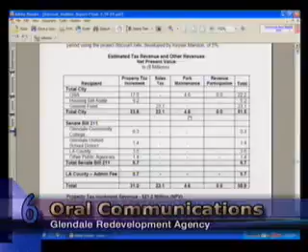If we had that property and were to maintain it, it would cost us $4.6 million, but we have pretty much given the full rights and authority for this park to Caruso. So as such, we only have these two particular sources of true income that the city can expect. But I would suggest that perhaps we can take a renewed look at those sources of income to see if they really match with what the original objectives were.

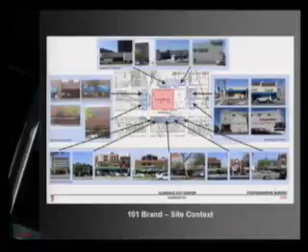Thank you. I'm Chris Hilton, HKS Architects. I'm one of several design directors with the firm. 101 Brand, as Scott said, is a significant investment for Legacy Partners. They look at 101 Brand as an opportunity, but an opportunity with some serious issues that are preventing the building from performing to its capacity, either in office or retail.

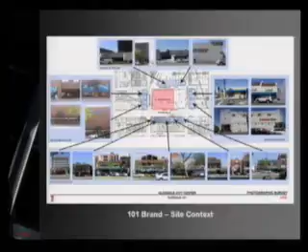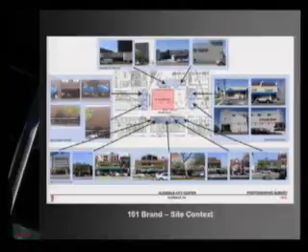This is a quick overview of the site. We all know where 101 Brand is, between Broadway and Wilson. It occupies approximately two-thirds of this site, on the east side of Brand. There is a new project coming on the north side of the block; I'm sure you're familiar with that.

The existing conditions for 101 Brand are not conducive to a Class A corporate office identity. They're not conducive to a functioning, successful retail identity either. If we were to sum up what we see from the street, the imagery of the ground level plaza, the building entries, and the retail, is clutter. There is tremendous visual clutter, and it's a combination of a lot of things: softscape, trees, poorly designed signage that is more of a problem. It actually doesn't function well as signage, and it just contributes to the clutter. We can't see the front door.

Even someone who's not involved in real estate would recognize that this building has a serious deficiency. If I can't find the front door, how are we going to rent this building out to Class A corporate tenants? Here's some other views of the existing conditions. The artwork also presents an issue because it's in direct line of sight to the front entrance of the building. The building has an architectural problem. Were we to remove all of the clutter, we would still have only a pair of doors hidden within a glass wall.

There's no identification of the door, even were we to remove most of the clutter that's prevented us from seeing the front door. Here's our plan. What it involves is, if the center of gravity is in the center of the plaza today, with a series of nine planters and palms in this area, the artwork in the pool, we are moving that to the north.

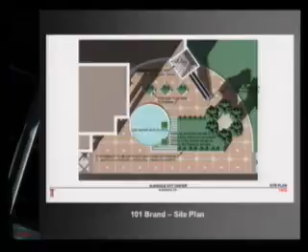The idea here was to introduce more people-friendly green space into the design. Right now, there's roughly 25% green space and water to hardscape in the existing design. This design raises that level to approaching 60% green space and water to hardscape. That would not, of course, include this area, which is city sidewalk.

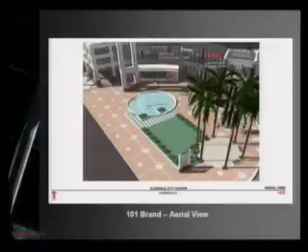If we look at this in aerial perspective, we can see the major elements. Again, we're removing and relocating artwork, removing palms and relocating those to this location to try to animate our approach to the second-level retail. We're introducing a much more friendly green space here for pedestrians. We've redone the signage consistent with the architecture of the building.

We're introducing a major new entry element to define the front door of the building. We're also introducing some blade signage here to help some of the colonnade retail that is not performing as well as it should. So this design, as you see it here, both in aerial and perspective, removes most of the visual impediments to seeing both the signage on the second level for the retail and the front entry of the building. We now have visual access to those elements.

This is a quick view of the landscape elements. Again, we're just relocating existing palms, introducing some dwarf palms into the planters, along with annuals, and then succulents along the edges of the green turf.

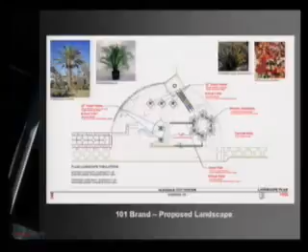Artwork: if you look, as we're moving along the sidewalk or along the street, you can see that the existing artwork is in direct line of sight to the entry. If we're going to invest in what we think is necessary here, we want to relocate this art both to solve an issue in terms of seeing past it to our entry, and to get it into an area where it's more involved with the traffic going to the residential or retail area, the Palm Court, and the second level above the escalator landing.

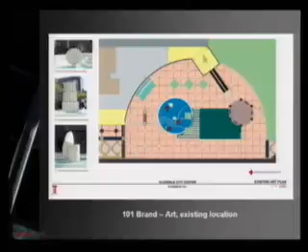When we arrive up at the landing of the escalator, we're putting the two smaller pieces of art in this location where we can get more interaction between people and the artwork at this level. We're really animating this entire experience of arrival at the site: recognizing the retail through the signage, passing through the circular palm court, experiencing the art, riding the escalator, and experiencing the art again.

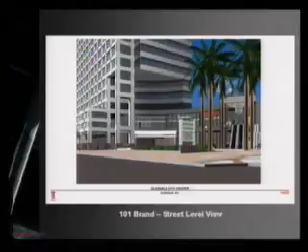This is where we will win or lose the day. This is the street level view from the sidewalk, from the street. Here you can see we now have an unobstructed view to the building entry and the new building entry element that we're adding to the site.

The new signage element that we're adding is the initial experience leading you to the circular palm court, the escalator, and the pyramid landing at the top of the escalator with two pieces of art up there, an additional introduced lantern element, and a lighting element working with the signage at the base, then moving on into the second level. You can see we've got some things occurring in there.

When you arrive at the second level today, it's a little disappointing. Clearly there's not much color, it's dark, it's not very friendly. We've got a very successful restaurant, California Pizza Kitchen, but we've had trouble leasing the other spaces.

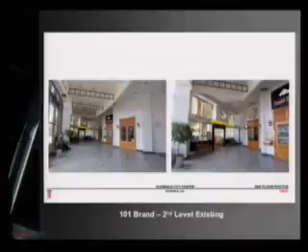So the proposal here is to go in and continue the experience through a very exhaustive remodel of the second level. You can see some of the ceiling elements we're looking at include lighting, and those would be visible from the street, from the sidewalk, once we remove all the clutter in the way of those.

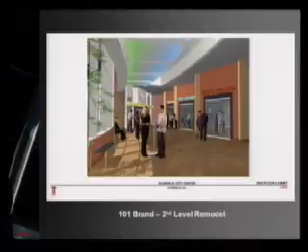The nighttime experience, we see clearly the project is 350,000 feet of office building, 60,000 feet of retail. In the daytime, it should have a successful office building environment, and we think we've achieved that. But in the late afternoon and evening, through lighting, signage, and more animated paths getting to the retail, we think we can turn it into a much more animated retail environment, a more active space in the evening. Right now it's pretty dead, and that's what we're trying to achieve with this implied lighting.

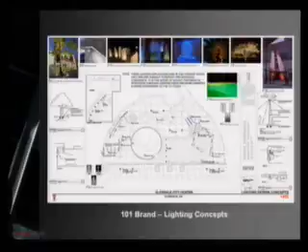Here's some of the ideas we're looking at in lighting, some of which we've committed to: animating the fountain with more jets and more lighting in the jets, lighting at the edges of the fountain. We're trying to take that fountain and turn it into a much more animated, living event in the plaza. Lighting for the palms at base and staff, and lighting of the shaft—that we're committed to as well.

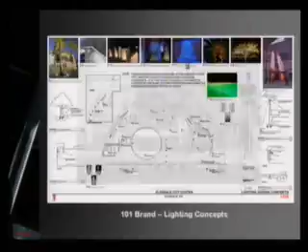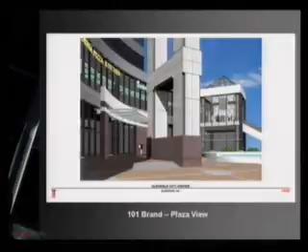But we're looking at other elements as well to try to improve the nighttime experience. Going through individual elements of the plaza, this is the now visible new entry element—a granite, aluminum, and glass entry canopy leading to the front doors, which are merely buried in the glass wall. This is done in a style consistent with the original architecture, consistent with the quality and materials of the original design. Here you see the lantern element and some of the artwork at the second level escalator landing.

You can see some of the more animated areas on the second level of the retail. One of the things we're doing here is replacing all the glass on the second level, which is currently a dark gray tinted glass, with clear glass, so that we can see in there, so that when we're spending money in that space, we can see it and draw people to it.

Here's a detail of that particular wall. Again, the materials are granite and aluminum. We've got a signage element, which is part of the signage package here—this is a building identity signage. This merely repeats what exists elsewhere on the building. Again, the materials are granite, aluminum, and glass.

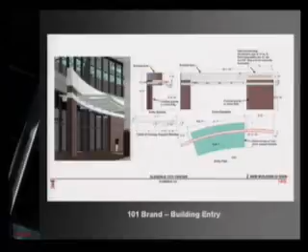Another element here is the retail signage on the street, which starts the retail experience. That's built out of the same base materials as the building, consistent with the quality and design in terms of materials, simplicity, and the corporate nature. In the evening, this is an internally illuminated sign with illuminated graphics as well, so it's got both a daytime identity and an evening identity.

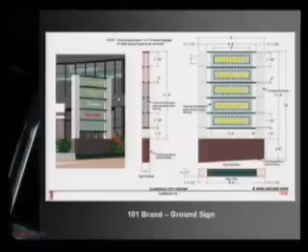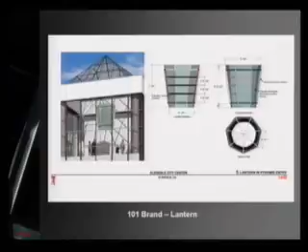The lantern, designed in the same quality and same materials, sits at the landing of the escalator, shared by the two art pieces. Here's another issue that is underperforming: the retail under the colonnade along the street. As you can see, it's dark under there. No one sees it, no one knows it's there.

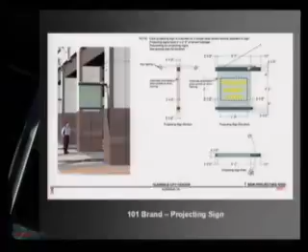We're proposing to introduce blade signage mounted on the columns that would identify the six different possible tenants in that location. This is designed consistently with the design concepts of the major signage we introduced in the plaza. This is internally illuminated blade signage, and if we don't have a tenant, we'll probably introduce a graphic that describes the project.

Materials: these signage elements and architectural elements are all custom fabricated, but made from readily identifiable materials—granite of the building, various aluminums and finishes, glass, and plexiglass.

This is part of the signage survey. By ordinance, when we introduced anything new in the signage, we needed to go back and do an entire survey of all the signage on the building, both ground floor, second floor, and exterior signage.

Phil, thank you. I appreciate that.

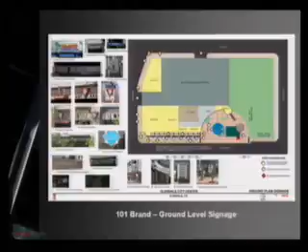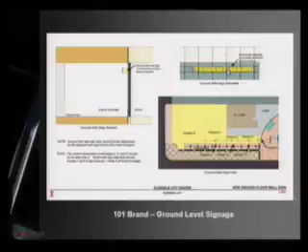For the exterior, we originally approached this as an interior signage element, but we ran into a rock and two hard places on this one. The retailers were not receptive at all to doing that on the interior, so we're sticking with what they currently have, which is signage mounted to the exterior of the mullions.

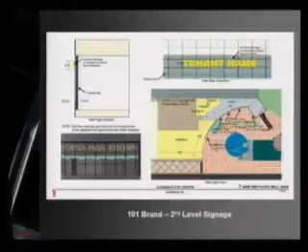More definition of the possible tenant spaces and possible signage locations. This is all part of the signage variance package. And with that ends our presentation, unless you have any questions I can help you with. Okay, thank you very much.

I don't have any cards on this item, so I'm going to close the public hearing and give it to my colleagues. Mr. Yusefian. Gentlemen,

A couple of questions. On your first page, on site plan, it talks about adding water jets to the pool. Could you elaborate on that? It's our intention, since we're asking to remove and relocate the artwork, to reanimate the pool with water jets located around the perimeter. We're working on a design as we speak, and then to animate the jets with light, as I showed you in the lighting diagram.

Okay, do you know what shape it's going to take? Is it going to shoot straight up, or is it going to go inside? Arcing inward is the general intention at the moment, and it's circular, fixed around the perimeter, but there would be individual elements at various levels within the pool. The pool is multi-leveled and has several falls, so we're in the design process right now, as I indicated in the lighting diagram. We're committed to that particular animation of the pool and the lighting that would further animate the water jet.

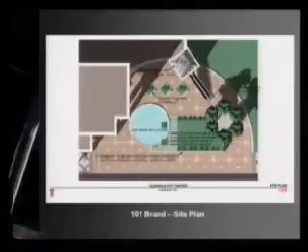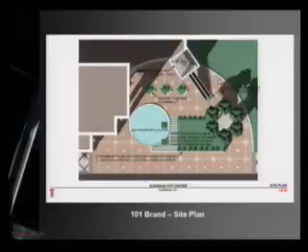Right, we know from their design goals that there's a restaurant in that location. But it's on the edge closer to the street, not an edge further by the escalator. That's correct. Actually, that area is less of an interface — it goes up two or three floors before they have landscaping for their pool and so on. So I hate to see mature trees, especially palm trees, which cost a lot of money at this size, just thrown away.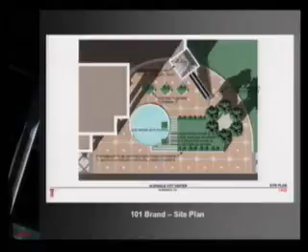You are changing lighting and introducing a new light fixture into the escalator area, but then you showed what the arcade looks like, and if you look at the lighting in the arcade, it's completely different and inconsistent with what you're putting into that tower. If we go to the lighting in the arcade, there really isn't much — that's part of the problem. It's very dark.

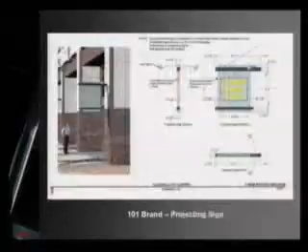Let's see if I get back here, in this area — look at those light designs. They basically have an amber color shade, which softens the light a lot. It's a different design than what you're doing out there. I'd say it's not as contemporary as what you're putting in the other one. What if you just change some of those lights so they're complementary to what you're putting in there? That's definitely something we can consider.

Okay, and that would solve two problems. It will be more consistent with what you're doing, modernizing it, and it will also brighten up and bring some more light in there, making it more inviting for people to go in.

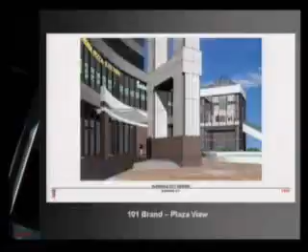The other issue for me is that you have created a nice flat grassy knoll area in the center, while you have a little sitting area on the...

See, there's a little sitting area, and that is a function of the elevation of the dirt. You have to kind of put that in there to retain the soil. On the opposite side, there's an opportunity to have something similar, even though you don't have a grade elevation issue, to create that type of wall on the opposite side.

So this way people can sit there while they're waiting to be called, while their vibrator goes off saying it's your turn to come eat at the restaurant. That would be helpful, even though there's no grade reason for it, just for friendly purposes. I don't think people want to sit there watching traffic go by—they'd rather sit on the other side and watch their friends get a seat before they do, or wait for their vibrator.

The other big objection I have to this project is removal of all the art from the fountain. Now, you don't have a lot of attachment to it—you don't live in Glendale. This, and a couple of horses on Brand, are the only two major art features we have on a building in the whole city.

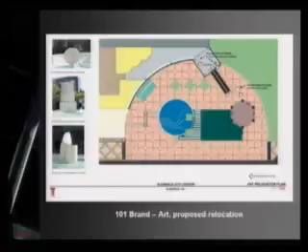One man's giant lifesaver face and a birthday cake is another man's giant ball of string at a contemporary museum of art. So I like what you're doing with it.

In my mind, if it's not going to be there, then all of it has to go. It's not our job to re-edit someone else's art, that's not our expertise and background. It's just a philosophical difference that some of us may have.

I do like the fact that you're introducing two smaller elements at the top of the escalator, because it is just an empty, nothing space. You will justify the space and justify the art by placing it there, and you'll lend focus to it. In addition, the thing I keep referring to as the birthday cake, it's a larger piece, so you will also lend focus to the downstairs.

I'm just curious whether or not we ever got his take on this piece and what we're proposing to do with it. I'm very pleased with the changes, I truly am.

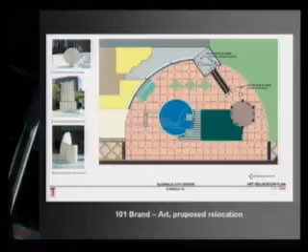However, if that had not existed, if it were placed in the manner you're planning to place it, 5 years from now, 10 years from now, if another architect came by and said this belongs down in the pond, down there in the front, we'd all be saying the same thing: hey, you're messing around with something this city is used to seeing.

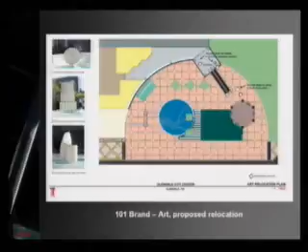I do like what you're doing, and I'm ready to go ahead. And I guess that's the end of my comments.

Mr. Quintero: I'm also very happy with the design. I think it really clears up the plaza, and I do like the artwork, the way you've grouped it, one at the bottom of the escalator and then the two at the top. The blade signs, I think, are absolutely necessary for the businesses under the colonnade, so I think that's a very good idea, and I think you've done a great job.

I'm looking forward to seeing the changes. After all these years, I still don't think of it as an office building, because you have some excellent tenants that have been there for years, Olive Garden and Islands, California Pizza Kitchen, so I think this refurbishing is going to help you attract the corporate tenants you're looking for, and also provide a great commercial space.

Thank you, very satisfied with your approach. Mr. Weaver: well, everything boils down to economics, how much money you have to invest. If I had unlimited money, I'd design it totally different.

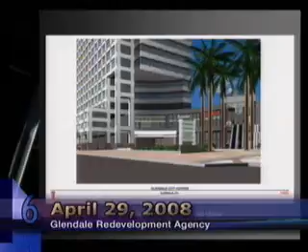Well, I think you make a good point, and I think you can recognize that the genesis of this particular element is consistent with the architecture of the tower. If it's being bent one way, it's not toward the looseness of retail, but the rigidity of corporate America—that's what's leading that design.

Now, we heard your comments, and we did some studies you might want to look at. They generally stay with this proposal, but they add a little more zip, a curve, a few things. One is very subtle on the left, the one on the right is a little more versioned. I don't think that's an issue anybody's going to die over, but it still has more of a corporate feel to it.

Okay, let me go to Mr. Quintero while you look at that. Yeah, I wanted to suggest, if you have trees, you could box them and donate them to the city of Glendale or some other nonprofit. I think they're taking notes—yeah, give them to us. Can you box any of my colleagues and donate to another city? Where there's a will, there's a way.

All right, that got an applause. All right.

Mr. Starber. Well, maybe just on the sign, a question on how it's constructed, materials—the rendering leads you to believe that it's not a typical box sign where a plastic face is in a metal box. It looks like the entire box, essentially, is illuminated from within, which is a very different look than a standard box sign like we saw represented at the marketplace. Here, the entire box seems to be translucent and illuminated from within. Part of our desire is to have a daytime corporate image, then have it transition with the lights in the afternoon and evening into something more retail and festive. Actually, between the two signs, I would prefer this design over the other one—I think it's actually cleaner, crisper.

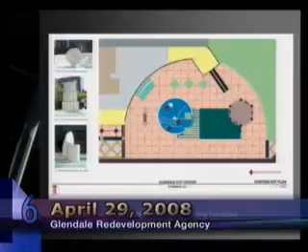So with that, Mr. Weaver, did you have a motion? I'd like to move 6B, items 1 and 2. Second. If there's no further discussion, roll call please.

Agency members: Drayman? Yes. Quintero? Yes. Weaver? Aye. Yousefian? No. Chairman Najarian? Yes. Let's move on to 6C please.

How about... we did 6B, 1 and 2, correct? Yes, 6C.

At 6C is another public hearing, from the Director of Development Services, regarding Stage 1 design review for the Glendale Triangle mixed-use project located at 3900 San Fernando Road. At C1 is a motion approving Stage 1 design review, subject to comments and conditions from the city's principal urban designer and the agency. Thank you.

This is a formal public hearing, and I will open up the hearing at 6C. Mr. Lanzafame.

Mr. Chairman, members of the agency, this is a Stage 1 design review of a property in the San Fernando Road corridor. Just a reminder, we have taken quite a few projects, Stage 1 and 2 together. Stage 1 is really site planning, massing, and scale. You will see introduced a little bit of the architectural design, but really what we're looking for is massing, scale, site planning, and then from that, your comments, they will start to finalize their design and use that as their project description for any environmental review.

So don't drill down too deep, fellas. There will be some refinement in the architecture, if I could translate your comment that way. We'll continue to work, the developer will continue to work with the urban designer, Alan Loomis, to bring you a final sometime later this year.

So here's our site here, the triangle site in the middle of all these great amenities, next to the train station. I don't have a pointer, do I? Does anybody have a... Use the mouse as a pointer. It's around the arrow. Whoops. How do I go back?

Okay, so we are between San Fernando, Los Feliz, and Central. A quarter mile or a 5-minute walk to the train station here, at a really interesting intersection, or crossroads, for an architect to work on a mixed-use project.

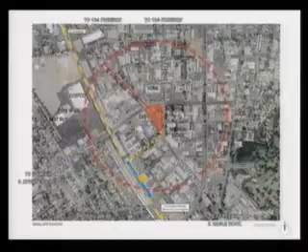A little more detail here on this aerial photo shows some of the zoning information in the San Fernando mixed-use area, in the industrial mixed-use area with, as Dan mentioned, the Vons and the CBS and, of course, the hospital. What that means for us in starting to look at what this project wants to do, both architecturally and as a new element in the community, is how does this serve as both a mixed-use building but also as a gateway into Glendale and a gateway into this new area, looking forward to all this revitalization.

What we've come up with is a two-tiered approach. One is the 3 dotted circles you see there. We are planning these as landmark corners, these iconic elements that will serve as wayfinding devices, letting you know that you're coming in from Atwater Village, you're coming south entering Glendale, and you're seeing these corners and you're saying, wow, here I am coming into Glendale.

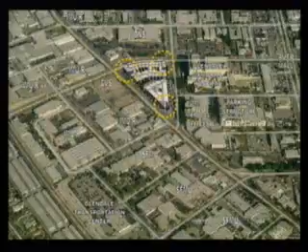That being said, here's our architectural story, if you will. At the junction, or intersection, of San Fernando and Central, we're planning a dynamic corner element that we've affectionately called the apex. Every architect's dream, I think, is to have a triangle building that comes to a sharp point, and we've taken that as far as we can go and still work within the setbacks. We've extended that, and I've got some great views of that in the next couple slides, so I won't talk too much about it, but we want this to be a dynamic wayfinding and iconic corner.

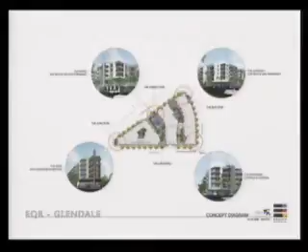Similarly, over on San Fernando at Los Feliz, we have what we call the gateway, a hovering or floating box sitting on top of a glowing retail storefront, street front, that will tell you you're coming into Glendale from the west. The entry is also what we're calling the entry into the building, for a pedestrian, both a guest or a resident. And then we've got another important corner intersection that I sometimes call the anchor. It takes a positive corner and comes right down to the sidewalk. It does not have the negative space of a plaza in front of it, but sits right at the sidewalk in a confident urban gesture.

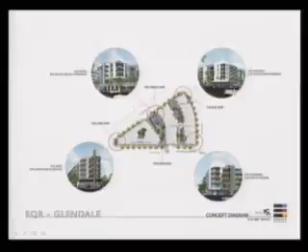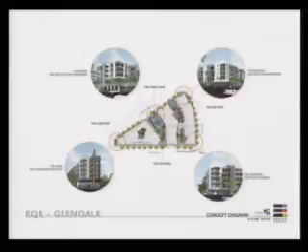And then down on the sidewalk level, we have a street cafe where the sidewalk has been widened, an area called the crossing, directly across from the hospital, where the sidewalk has been widened. This is the second, or backdoor, entry into the project. And also the bus stop up at the corner of Los Feliz and San Fernando, where the sidewalk has been widened to accommodate waiting for the bus.

Here's that apex corner in the first part of our schematic design. Proposing here that there could be a significant arch element that comes out, literally reaches across the plaza at grade. We're proposing that it has a thin light element running up the middle so that at nighttime it continues to act as a wayfinding device, and possibly running these decks, the private residential decks, out on top of the plaza area, really emphasizing that this is an important corner.

This possibly could be an art component to the project. We really like the idea that the art component can also be a part of the architecture, come and touch ground, and be a part of the urban design. I think that there's a lot of strength and potential in that idea.

This is that floating box idea at the corner of Los Feliz and San Fernando, sitting on top of a dynamic and important storefront facade that's right at the sidewalk, with an extended sidewalk near the bus stop. We'll talk more about this architecture in the next couple of slides. And then the anchor, or the standard corner, that comes right down to ground, holds its corner at the intersection of Central and Los Feliz.

The fourth rendering shows the front door to the building if you're a resident, also the front door if you're coming to use the commercial space. This is the entry for commercial parking, as well as the way you would walk out from the commercial parking space onto a sidewalk cafe. Over here is the front door to the apartment buildings with the entry lobby and leasing, really playing up the fact that this is a wayfinding opportunity and front door to the building.

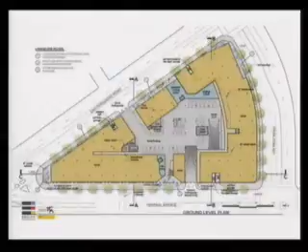This triangular building on the left and this H-shaped building on the right are going to come down to the sidewalk and read as two separate buildings. The way we do that is to set back this courtyard level here and here 20 or so feet from the sidewalk, so that you have these lines that come down from the corners of the buildings. This breaks up the scale a bit with the hospital across the street, the Vons, the bigger mixed-use buildings coming in. It just feels like the right scale for the neighborhood, particularly when it's broken into these two component parts.

The leasing leads you up to the clubhouse level. The clubhouse is here directly opposite the pool. There's a fitness room that enjoys expansive glass looking out onto San Fernando. There are some small water features in the other courtyards. And then, of course, the main pool courtyard directly opposite the clubhouse and fitness. Like I said, it has a resort-style feel at 80 or so feet wide and 120 or so feet in length.

I believe this is where I segue into discussion about landscape. You're going to get into landscaping?

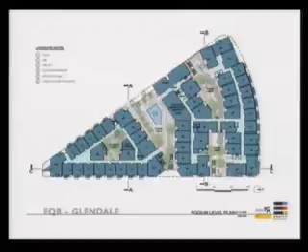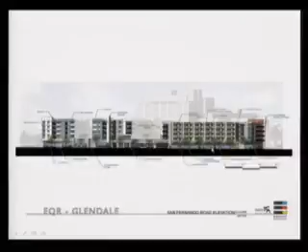Moving off the courtyard level, I'd like to take a look at the elevations. This is the San Fernando elevation, and those ground level planters that Charles spoke of are here at the bottom of these columns. I agree, this is a really exciting feature of the overall sustainability of the building.

Another component of that sustainable design is the solar orientation, or location of the windows. It's not always easy to do in a residential project like this, but it's exciting how the location of the fenestration has partly influenced the look of the building.

One example of that is here on the right side, the tall... sorry, how do I get the pointer back? Do I push down? Okay.

This element has windows flanking either side, and it's small and hard to see the detail, but this also has a shading device on the left as well as a trellis above to shelter or shade the windows from the southwest sun.

On the north side, not so much of a problem, and you'll see on the other side that there's a lot more glass on Los Feliz. It's exciting that this is starting to give form to the building, telling us we can take this idea of verticality and let it permeate through the entire elevation of this triangular building, then do something different on the other side to reinforce the fact that these are two.

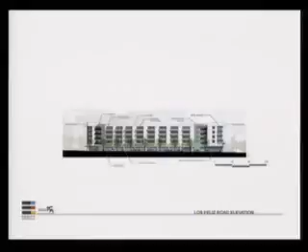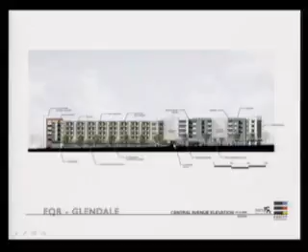Okay, so if you could do one more slide after this, I believe. The last elevation on Central shows the triangular building with the vertical emphasis and the sun shading devices, and the horizontal building to the right off of Los Feliz. You can see the second entrance for residents below the courtyard, as well as the vehicular entry for residents. I believe that's all we have.